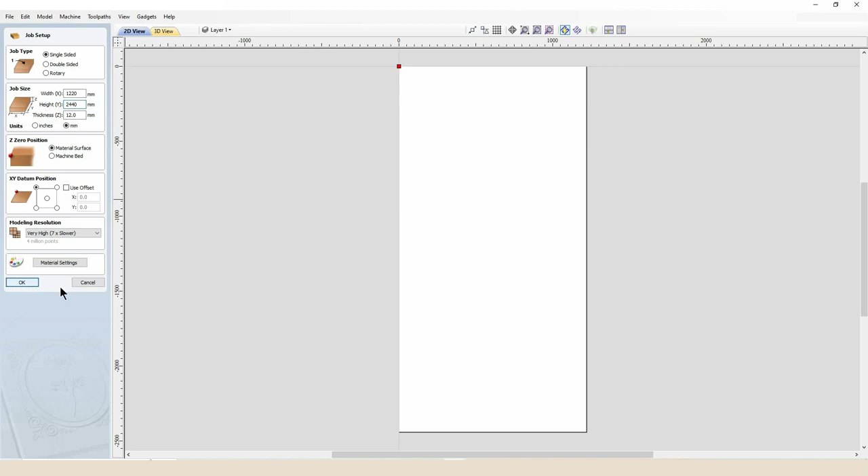Let's get started. So I'm going to go into creating a new file. And the first thing we're going to do is set up a full 8 by 4 foot sheet. And our stock is 12 millimeters thick. So we're going to dive straight into the Gadget area of VCarve Pro, and we're going to go down to Box Creator. Now, I want to show you an example of how Box Creator kind of functions.

Now, the first thing I'm going to do, it's going to throw up an error, is because our box components will not fit completely on this sheet. Okay, so these are our basic parameters. We're going to create all sides to our cube. We're going to be using a 5 millimeter end mill for this one, and I would like a tab lid, and I would like square tabs.

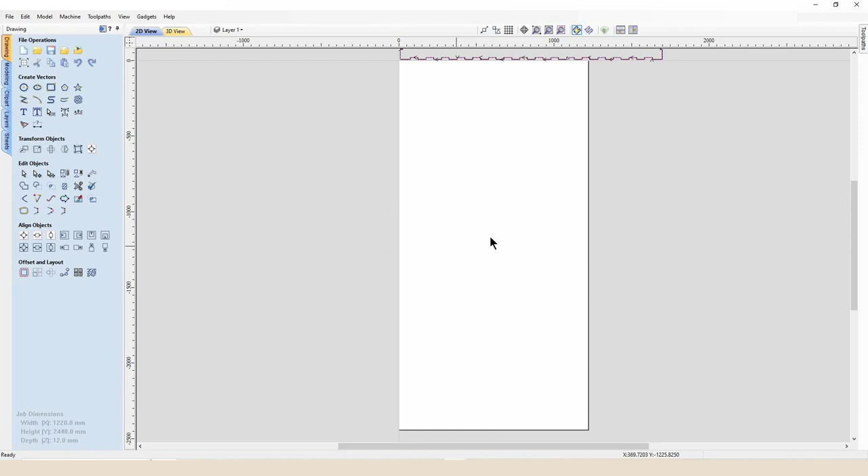So for this particular box, we're going to make an allowance of 0.1. You are probably going to need to play with this allowance feature to get your finger tabs to fit exactly how you want them. So you'll notice it's now saying that it couldn't arrange quick enough, which basically means all of these parts don't fit on this sheet. So I'm going to delete the toolpath that is created, and I'm going to flash up and I'm going to delete all of the parts.

Now, the quickest and easiest way to get around this is to create a much bigger workspace. So I'm going to change that to 8 by 8 square, and that should be big enough now. When I go back into our Box Creator gadget, it's kept our 1685 in width, our 375 in height and depth. It's kept our joints. We just need to re-input the 0.1 allowance. We want a tabbed lid, and we want square joints.

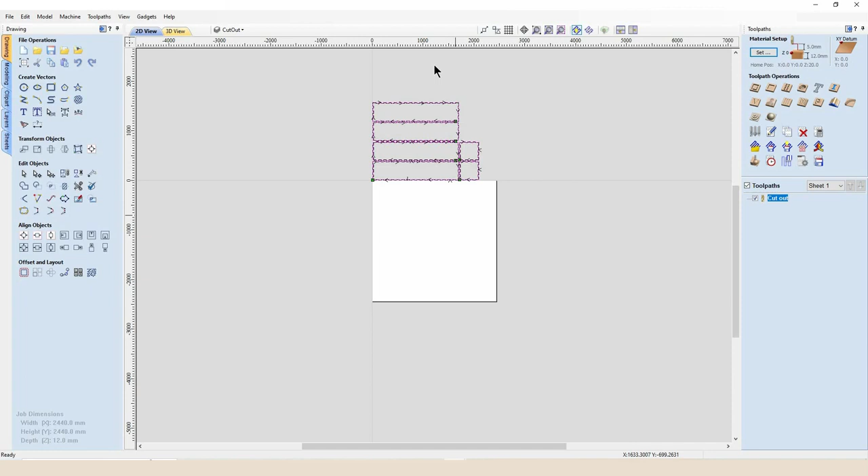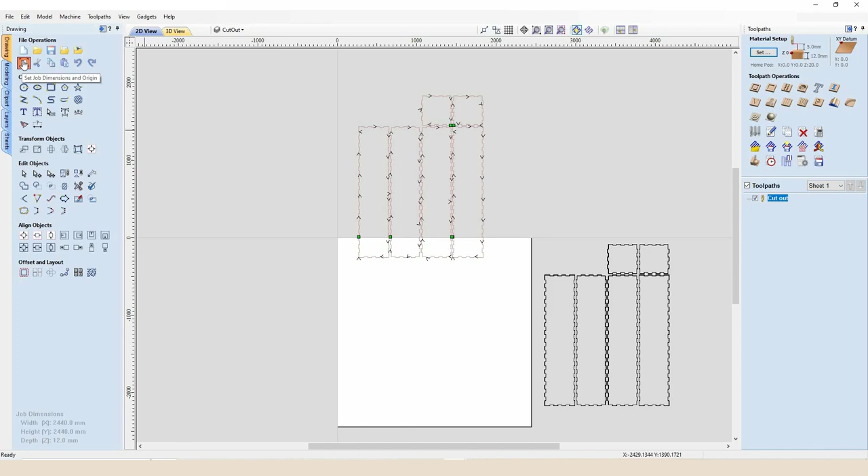Now what it's done is it's repopulated all of our parts. So I'm going to pick those up and I'm going to turn those 90 degrees. And if I come across to our toolpath and recalculate that, that's now going to recalculate all of our parts together. So for this exercise, I'm just going to drag it down to here, out of the way. And I'm going to come back over to our job dimensions, and I'm going to change that back to an 8x4 sheet. Okay, so that's a really easy and quick way to cheat the system and effectively get what you need.

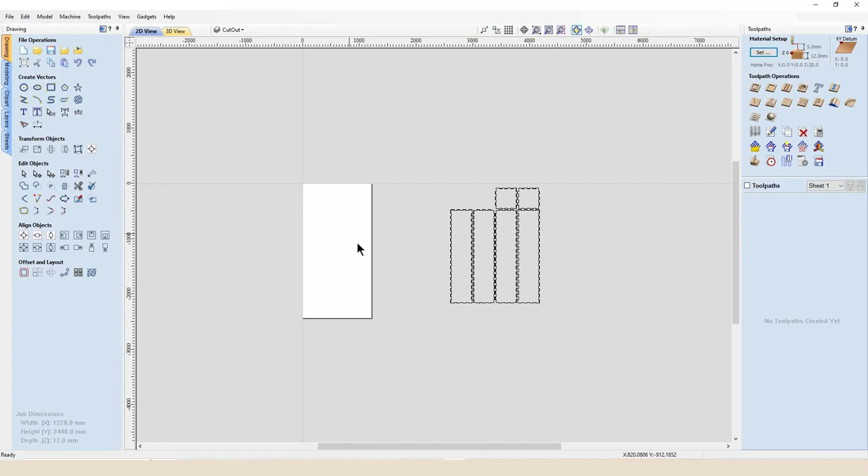All right, so you can see there's all of our 50 millimeter tabs. There's all of our box components. So the next step is going to be creating some smaller boxes, which are going to sit on the inside of our flight case, and that will be used then to hold our X-Beam in position. So for this box, we are going to have a width of 400 millimeters. We're going to have a depth of 95 millimeters. We're going to have a height of 80 millimeters and a joint width of 20 millimeters.

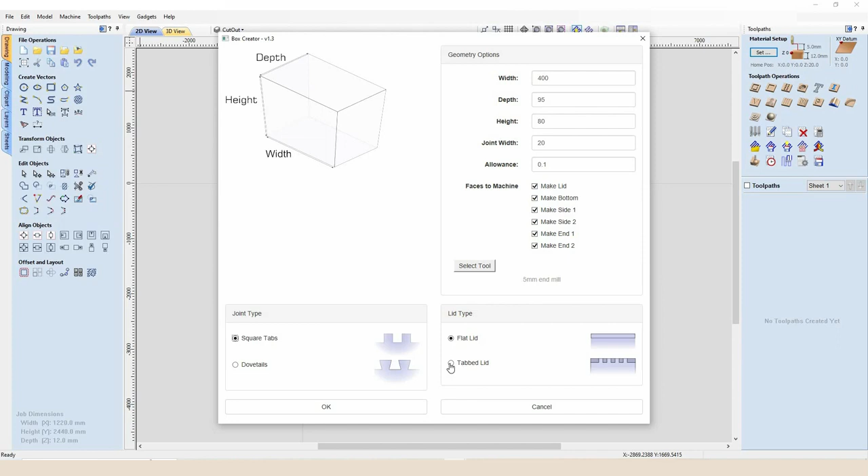Again, we're going to have the same 0.1 allowance. We're going to use the same 5 mil end mill. And again, selecting the square tabs and a tab lid. And you'll see there are our parts. So we'll orientate those by 90 degrees. And we'll drop those there.

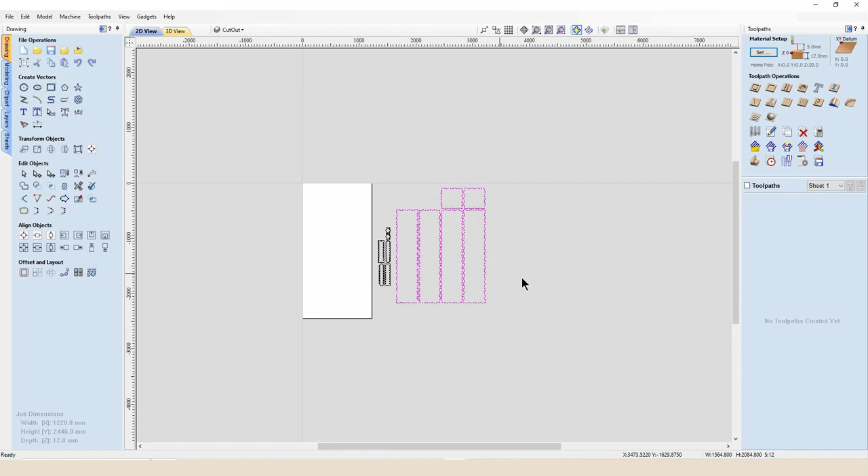Okay, again, I'm quite happy to delete this pre-predicted toolpath because we're going to do something quite clever now, which is we're going to re-nest, and we're going to use VCarve then to tell us how many components we can fit into one sheet. So if I start at the bottom right of my screen, hold the left mouse button down and come up and drag and select all of those parts, I'm going to come across to our nesting function.

Okay. So we'll start off at the top. We've got our 5 millimeter tool. We want to create a clearance between each part of 8 millimeters. And we want a border gap around the edge of our sheet of 20 millimeters, which is going to allow us then to fix our sheet down.

Now, just be warned, if you're going to try and cut a part which is full 8 on the sheet, by having the border gap of 20 millimeters, it won't allow you because it believes that part will no longer fit on your sheet. So we're going to allow it to rotate our parts by 90 degrees for best fit. And we want a number of copies. We want just one for the time being.

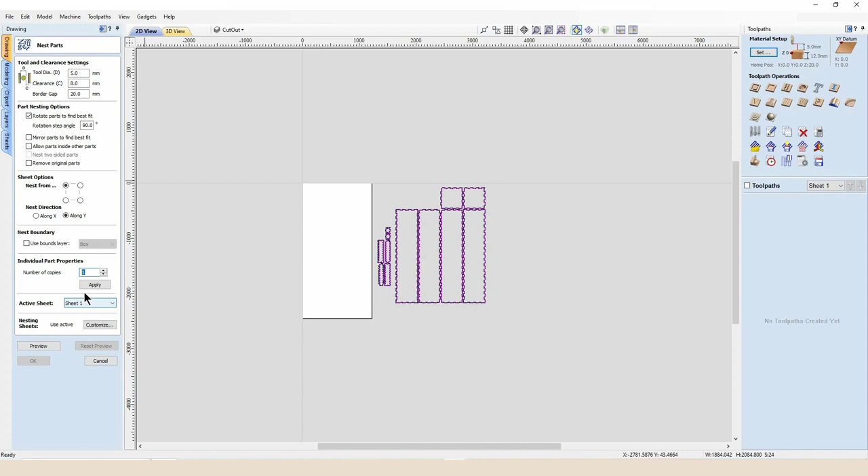So we're going to select apply. And if we preview that, that will then bring up sheet 2, which has a number of our parts, and then sheet 3. Okay, so I'm fairly happy with that for the time being. However, I'm going to make some changes.

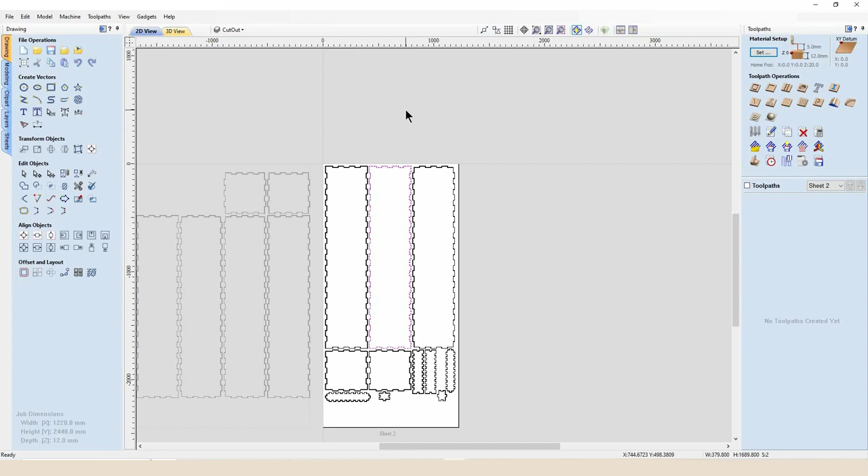So this part here, I actually want on sheet 2, which is going to be our lid. So if I hold Control and press X, then double click on sheet 3, and then hold Control again and press V. That's now copied and pasted that part. I'm now going to select these parts for our side piece. I'm going to hold Control and press X again. I'm going to come back to sheet 2. I'm going to hold Control, press V, and then I've got the parts in the correct orientation.

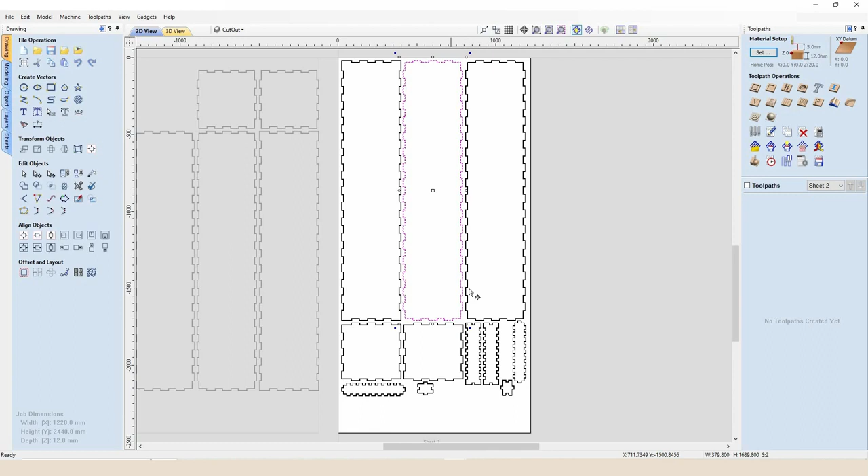So this will be our base, and this will be our 2 sides. This is going to be our ends, and this will be one of the internal boxes. And again, I'm just going to shuffle this around to get it just how I want it. And then effectively we have a top and base and the 2 sides. Now I need 2 of these internal boxes. So if I just bring this along, shuffle it around so it's reorientated for me.

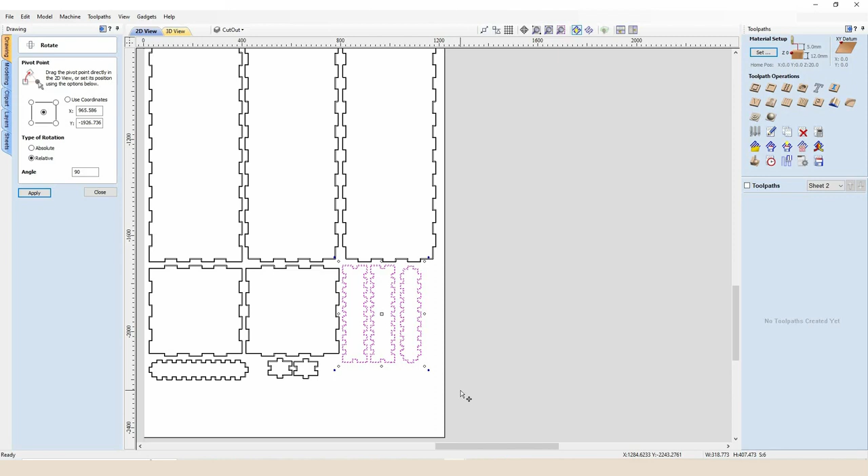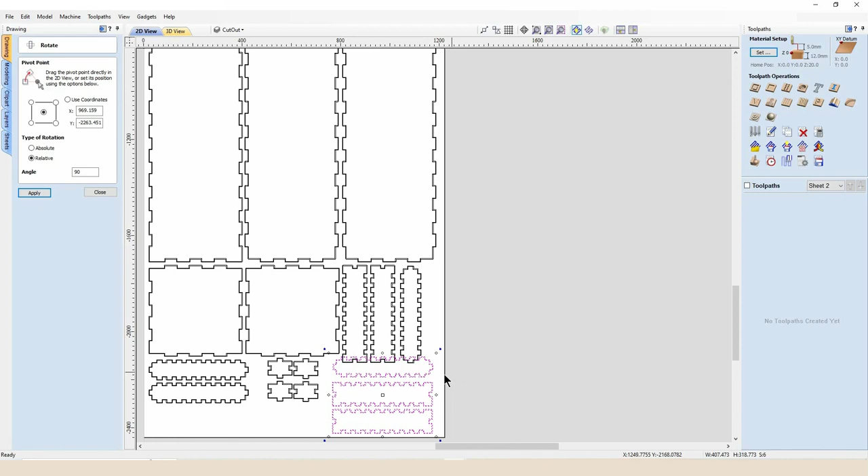I'm going to select these and hold Control and press C for copy and then V for paste. And I'll move these bits along here out of the way, just so I know what I'm looking at. And I'm going to hold Control again, press C and V to recopy these parts. And now I'm just going to shuffle these around and reorientate them so they fit on our sheet. Okay, so very simply, that is the main components of our job.

We're now going to start to add some of the different features to make this flight case function. So I'm going to start by adding the handle holes for our flight case handles. So those handle holes are going to be 130 millimeters by 80 millimeters tall. And I'm going to drop one in there. I'm going to drop one in there.

So if I start by selecting our first handle hole and then holding shift, I'm going to select the actual vector. I'm going to come over to our alignment tools and I'm going to center the object within this vector. So that's very, very simple and easy. Again, I'm going to select this handle hole and I'm going to select this vector. And again, I'm going to center that one.

That's those objects done. The next thing I need to look at is then going to be the cutout apertures for our flight case wheels. So I'm going to create a square with square corners. Well, I'm actually creating a rectangle. I want our rectangle to be 35 millimeters on the x-axis and 55 millimeters on the y-axis. And again, I'm going to drop one there. I'm going to drop one there. I'm going to drop one there and one there.

So with a little bit of shuffling, I'm going to select one of my flight case wheel apertures and I'm going to select the vector which it will sit within. And I want it to sit in line with the bottom. All I'm going to do now is using the direction keys on the keyboard, I'm going to shuffle this into place so it sits bang on this vector line. So you need to zoom in and zoom in and zoom in. Once you get used to doing it, it's not too bad. It's a little bit fiddly at first.

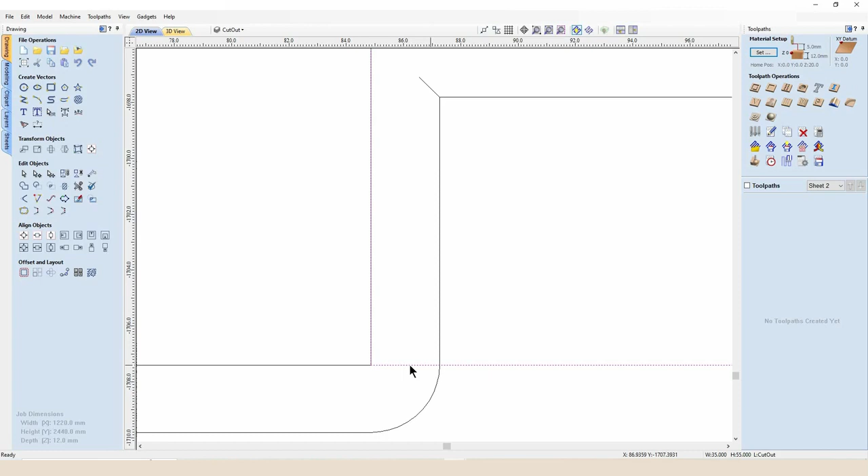Okay, so I'm really happy with that. As I zoom in now, I'm very, very close. I'm onto that line. So you'll notice the new vector, which we're going to cut, our little internal profile, sits perfectly in line with the bottom of the vector. And I'm going to orientate it to sit inside of this tab here.

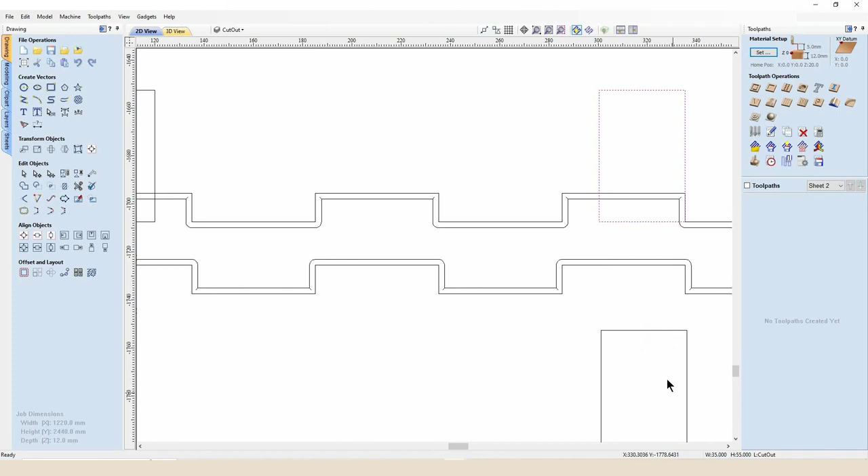So we'll do exactly the same again. We'll select this hole. Holding shift, we'll select our outside vector. And we'll use align to the bottom. And we'll just nudge that across until we're happy with the placement where these two vectors are sitting smack bang over the top of each other. So again, for these bottom wheel cutouts, we'll follow exactly the same principle. We'll align it to the top.

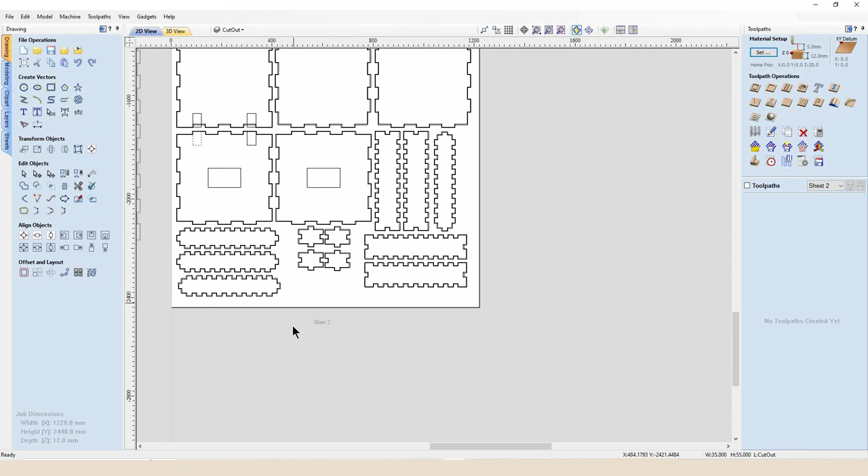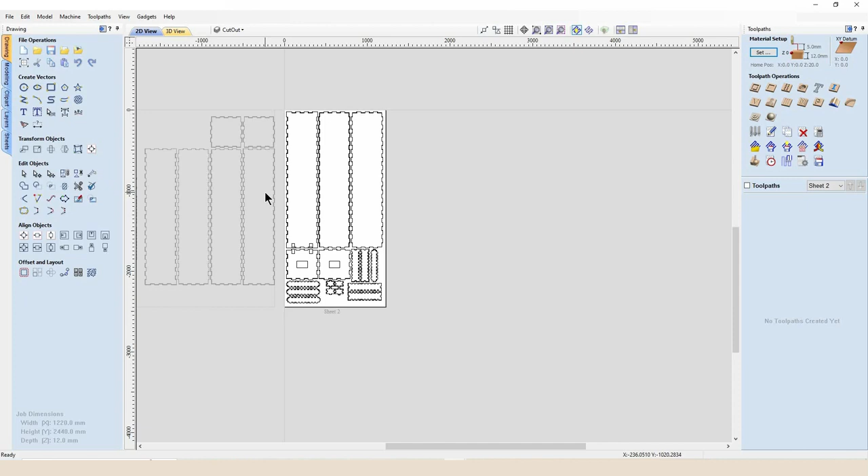At this stage, I've got all of the main components designed for the outside of our flight case. And I've also designed the inside parts which are going to hold our X-beam inside the flight case. We've created now some of the different handle hole features and the internal cuts then for our small wheels. We're going to go ahead now and design the extra auxiliary parts which are going to go inside the flight case and hold all that X-beam in place while you're in transit.

So the next part I'm going to design is going to be some plates that will sit inside of the X-beam and hold the upper part of the X-beam into the flight case. So we're going to have two parts at 180 millimeters on the X-axis, and they're going to be 390 millimeters on the Y-axis. So I'll drop one there.

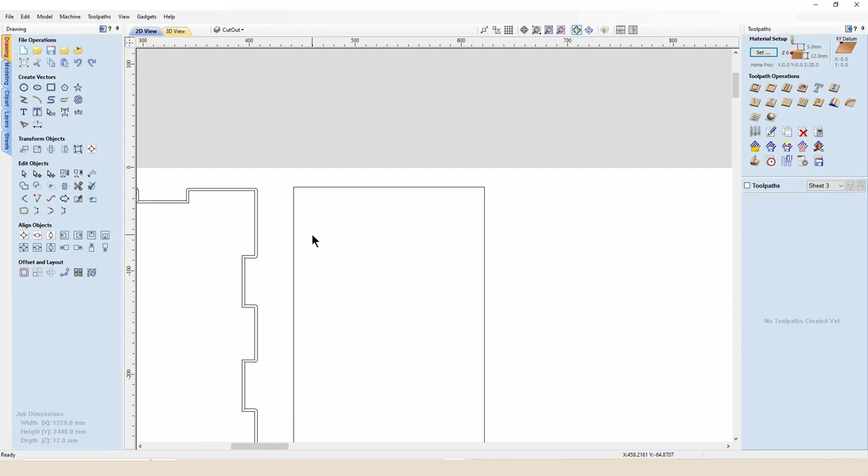We're going to make some modifications to this to fit over the inside of our X-beam, there's a small electrical feature that sits there. And what we're going to do is create a cutout on all 4 of the corners on both parts. So no matter how you've got this part configured, you're never ever going to clash with it. So I'm going to make a small extra box, which is going to be 15 millimeters on the X-axis and only 10 millimeters on the Y.

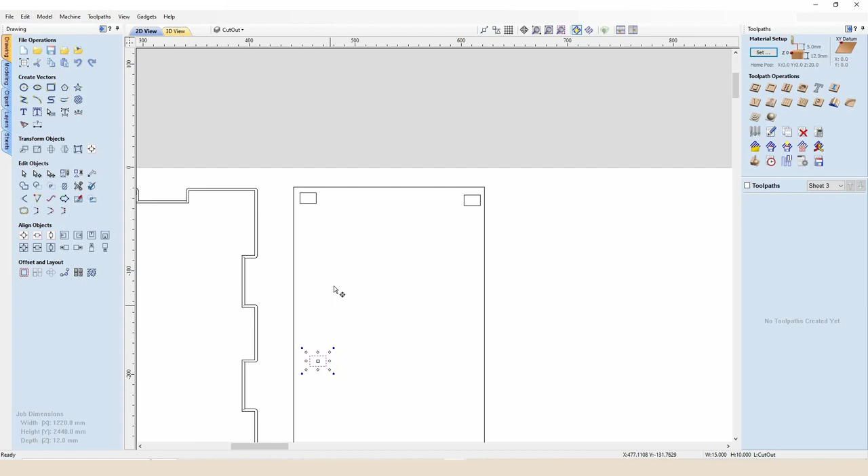And we'll just copy and paste. And we'll set one up for each of the corners. And again, using the alignment tools, very simply, we're going to select our part, we're going to select our outer vector, and we're going to drop those into place. Nice and simple. And it's accurate as well, that's the main thing.

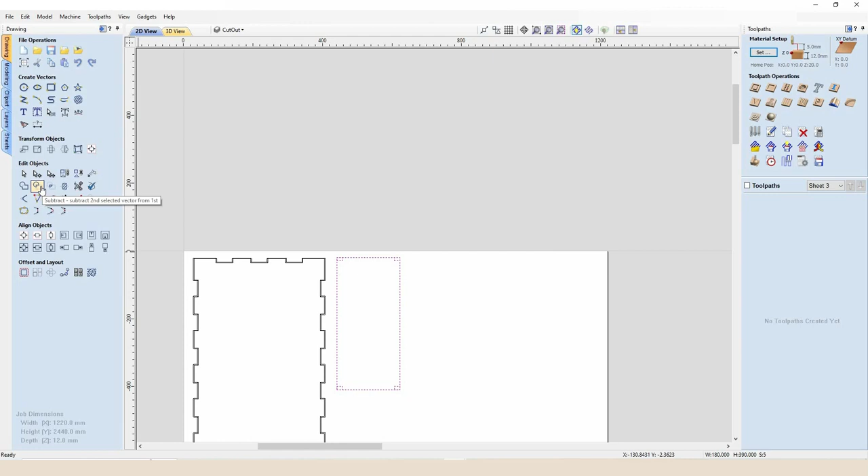So if I start again down the right-hand side, holding the left mouse button down, I can select all of those. I'm going to come over to the subtract second selected vectors. And what it's done is very quickly, it's cut out all of those extra vector lines that we didn't want. So that's nice and neat and an easy, quick way of doing it.

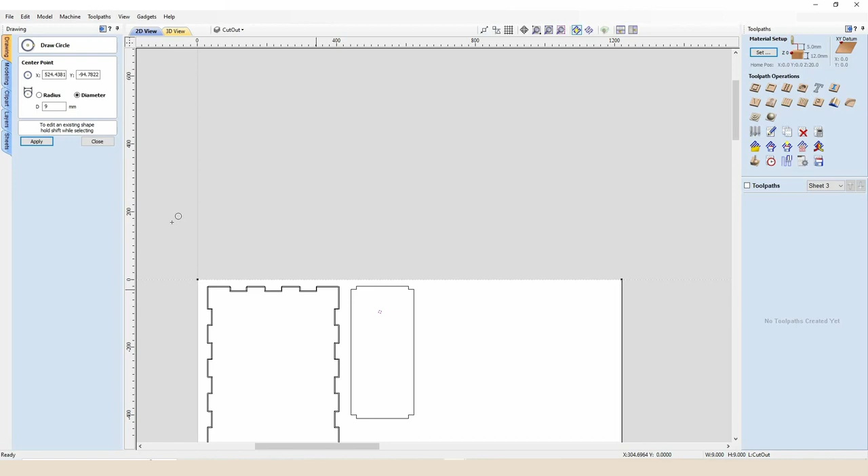So we're going to cut some holes in this box now. That is going to sit over some internal bolts. So we want a 9mm hole. So we'll select that one there. And these holes are going to be offset, which will give you a center measurement. They're going to be offset by 261 millimeters.

So I've got both of those holes there. I'm going to group those. For the moment, I will just center them into my board. Okay, so now I'm going to take those holes, and again, I'm going to select our outside vector, and I'm going to center those 2 holes to sit within this little fixing plate.

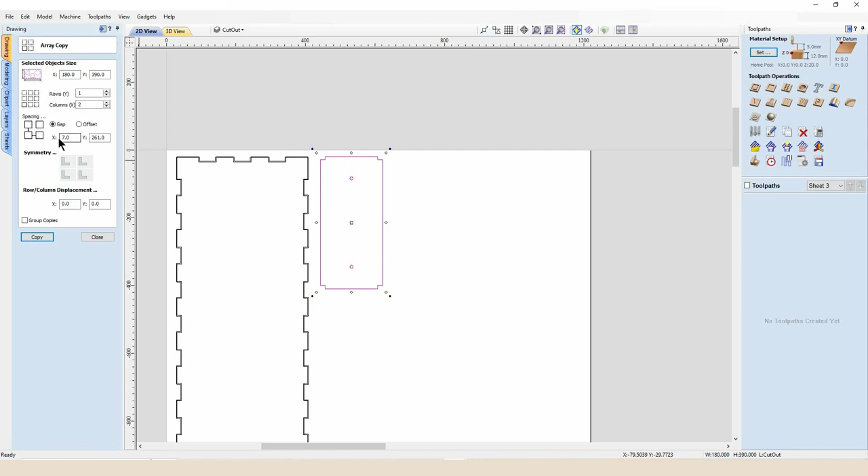Okay, so nice and simply then, I'm going to grab both of these. I'm going to press G on the keypad to group them together, and I'm going to nest them. Am I going to nest them? No. Then I'm going to array copy them. I want 2 of those on the X-axis, and I'm going to gap them to be 7 millimeters apart. Okay. So nice and simply, we're going to do that.

And I'm just going to pick up all of these parts now, and move them across so they're closer to minimize our offcut. And if I press U, that's then going to ungroup those parts again so they can all be moved singular. Okay, so now I've got those parts designed. I'm going to pick them up, and for the time being, I'm just going to move them off the sheet, ready for some better orientation later.

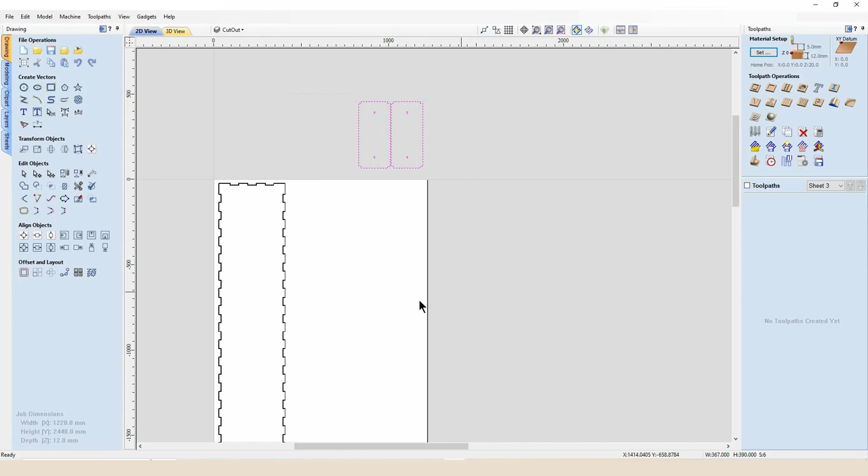So the next stage then is to create some strips that are going to sit on the inside of the lid, and will just help keep everything nice and firm when it's all together and help you align the lid when you're putting it back on. So the first part I'm going to make will be the long strips. So they are 1,661 millimeters in length. I'm going to make all of these strips 60 millimeters wide.

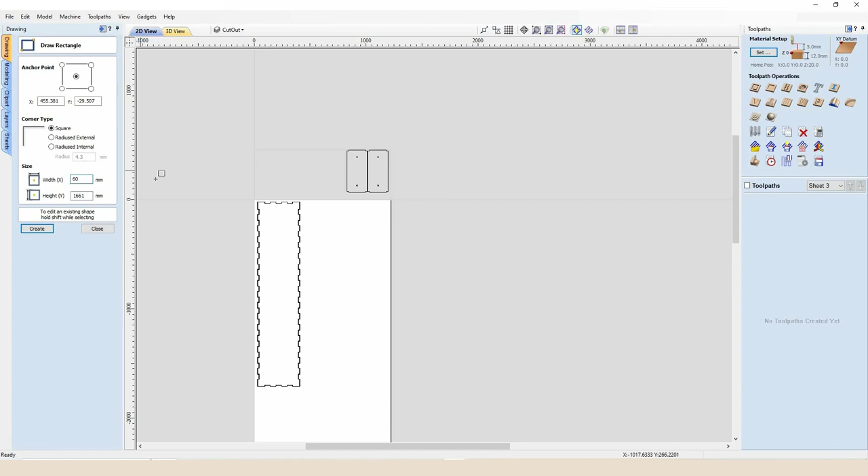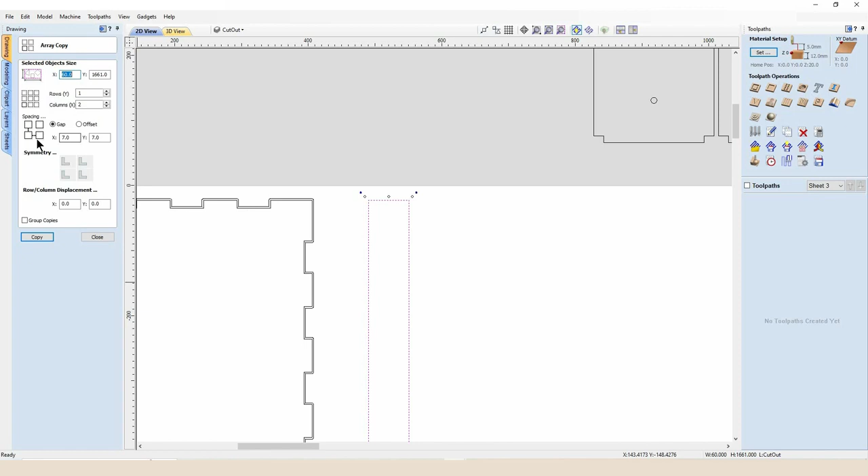So again, if I drop one of those onto my sheet, I can then select this first vector and get that to run nice in line. So all of our cuts will be nice in line. And I'm going to pick up this one, and again, using the array copy, I'm going to ask for it to copy 2 of those across the X-axis with a 7 millimeter gap. So we've got both of those. I'm going to bring them along and just move them closer now to our lid part.

I don't want to move them too close because I'm going to have these little square parts left on our sheet. So if I move these too close, then these will become small little cubes that might pop out of your sheet and interrupt your cut. So the next step is to create the little width strips. So again, keeping that X-axis at 60 mil, we're going to change the Y-axis to 328 millimeters.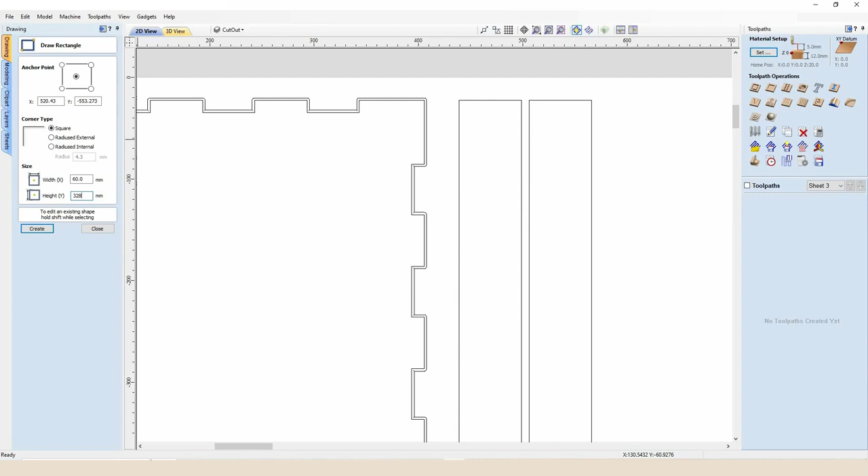And again, for the time being, I'm just going to drop one over here, move that out of the way. I'll select this one again, and we'll just get that to run in line for the time being. Very simply then, I'm going to pick up that one vector, come back to our array copy, and using exactly the same parameters again, we now have 2.

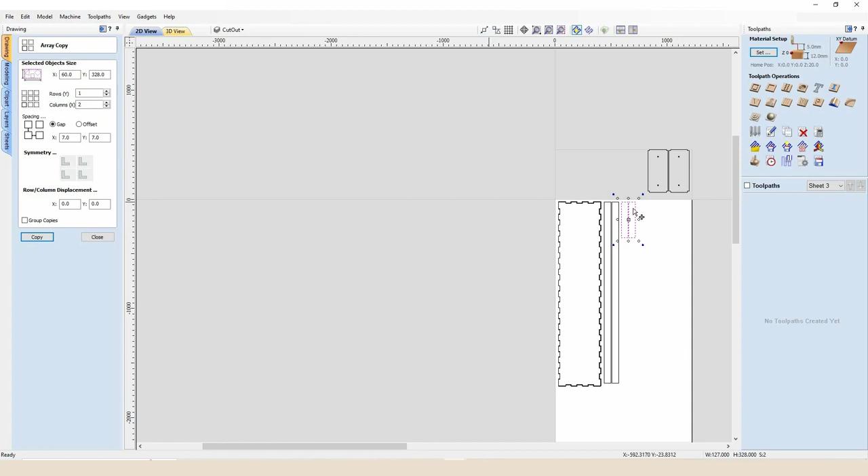Okay, so I'm now going to start to orientate those on our sheet, and I'll pick up all of these parts again, and I'll line those all up. Now, what I can do is I can make a 7 millimeter long box and just drop it there, and use that to start to align our parts. So I've got my 7mm box added.

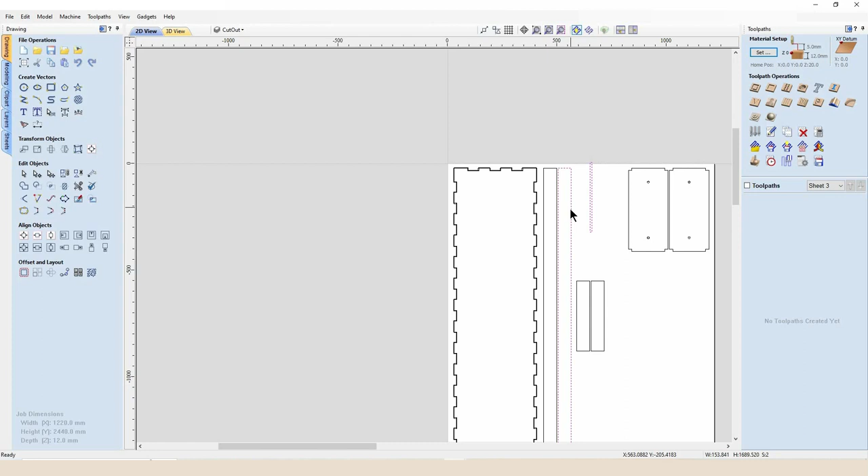I'm going to nudge that up against this vector, and I'm going to select this one and our little scrap 7mm, and just bring that across so that's nice and efficient. So we've got nice, even 7mm gaps on everything. And again, I can bring this down and I can pick up these two vectors and group them together and get them to align nice and neatly with our 7mm spacer.

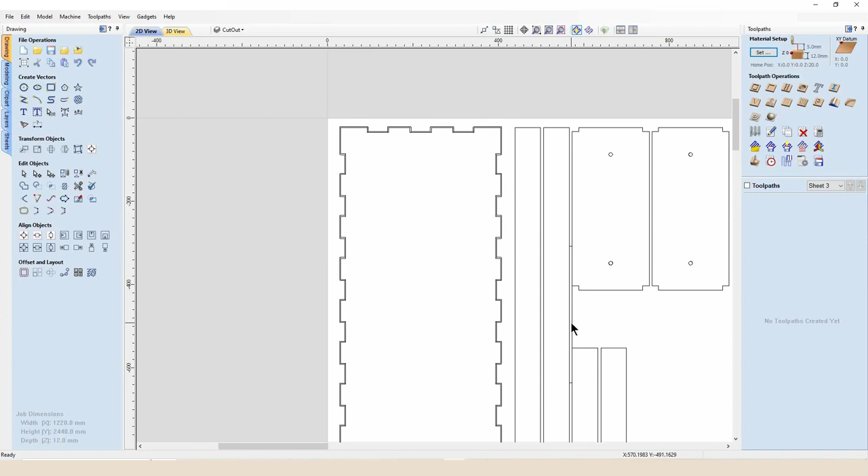And for the time being, I can just delete that 7mm spacer and I've got nice, even 7mm gaps around everything. So I'll just bring these parts up a little closer and we'll ungroup those. And again, I'll come back to these spacer parts for the time being and just ungroup them. There we go, nice and simple and an efficient use of our sheet.

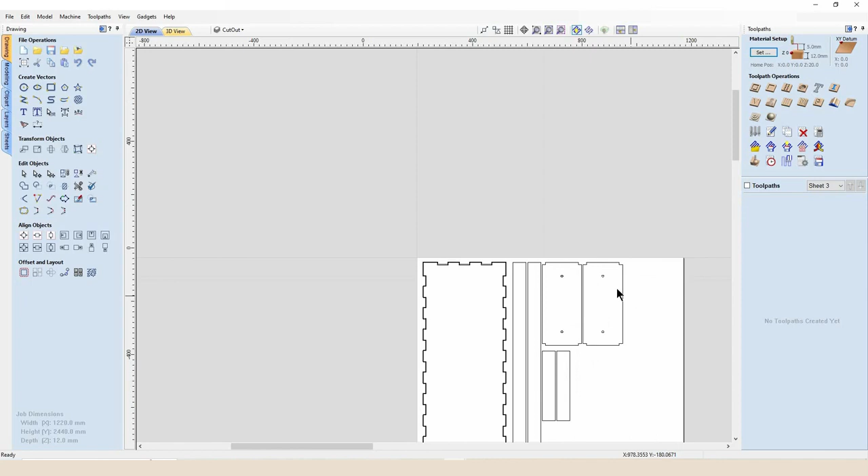So the last thing I would like to create is now some spacer packers, which are going to sit on the inside of our little lids. And those little spacer packers then are just going to create a gap between our X-beam and our internal boxes for our nuts and washers to sit. So I'm going to want 4 of those.

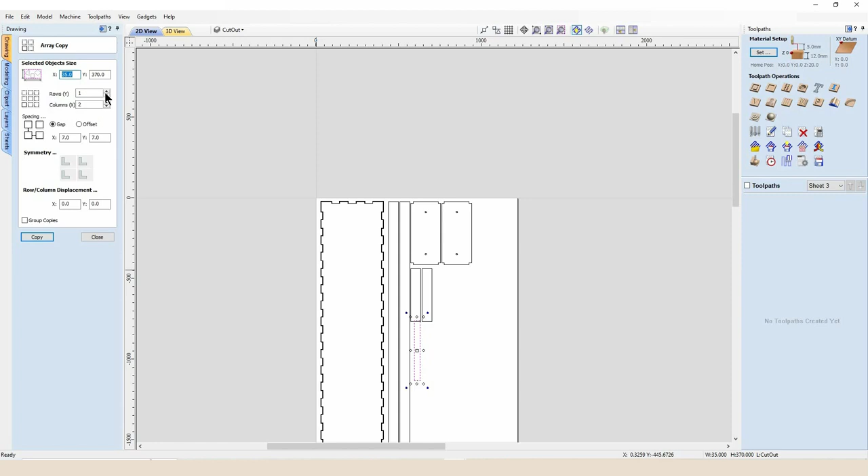So the first thing we'll do is we'll create one, and they're going to be 35mm wide by 370mm in length. And we'll drop one down there. And again, using our array copy, I will select 4 of those. Nice and simply, they've all popped down in line. So I can select all of these 4 and I can just nudge them along till they run in line with all the rest of our parts. I'm making sure I've got adequate spacing on the y-axis then, just so I can add some tabs for some strength.

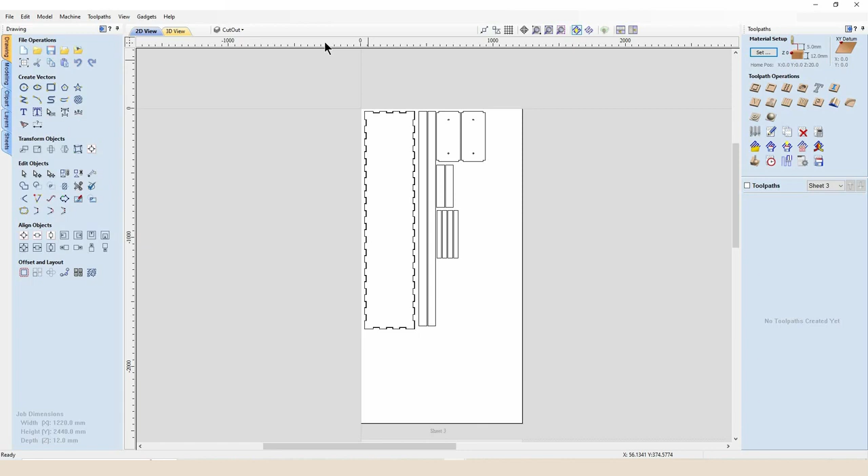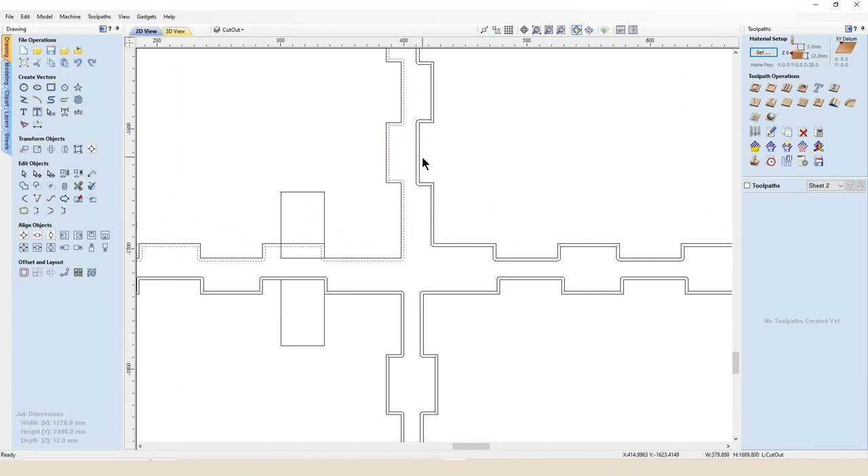That is all of our internal accessories created then, which is going to finish off the inside of our flight case. So now we're going to go back to our second sheet firstly, and we're going to create some very simple toolpaths. Okay, so you'll notice any vectors we create with the box gadget is going to be the actual box vector itself, and this secondary vector with this dotted line here is going to be the line that will create our toolpaths on. So I'm just going to hold shift down and I'm going to go and select each one of those vectors one at a time. Okay, so now I've got all of those outside vectors selected.

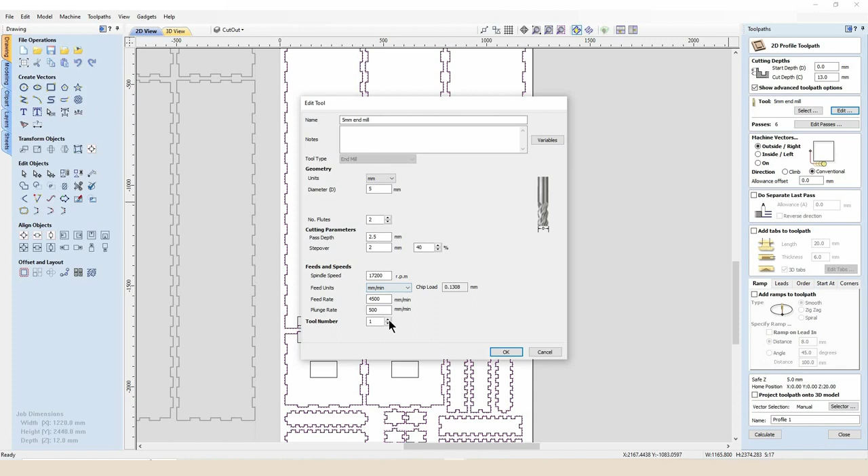I'm going to go to Profile Toolpath, and we are now going to mimic exactly what the box creator gadget will do. So I want to cut 1mm into my spoil board. So I'm going to make sure I've got a 13mm depth of cut. I'm going to select my 5mm end mill, and I'm just going to check that I've got 17,200 RPM. I'm cutting it 2.5mm per pass, and I'm running at a feed rate of 4,500mm a minute, or 4.5 meters. And I want to cut on the line.

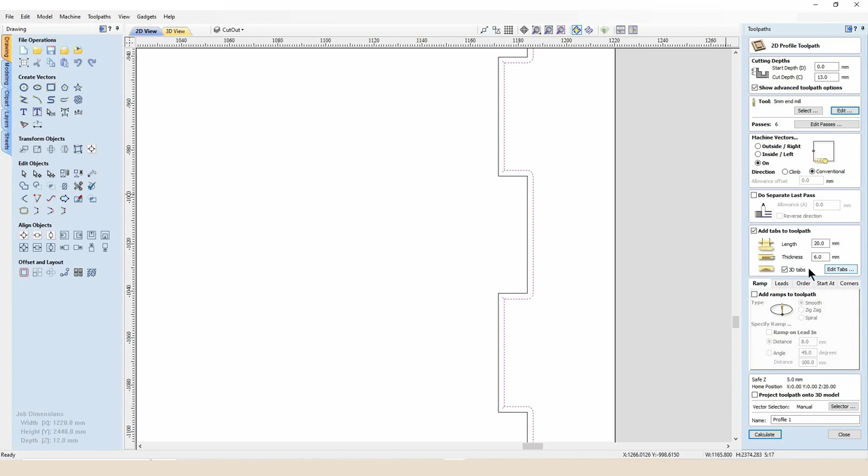Okay, so that's very specific in regards to the box creator gadget. That cutter is going to straddle the line and cut on the line. I'm not going to do a separate last pass because that's going to make our box effectively smaller. And I'm going to create some tabs at 6mm high by 20mm in length, and I want those to be 3D tabs.

Okay, so the box creator gadget is now going to throw up all of these tabs. And in a minute, I'm going to go around and I'm going to reselect and deselect certain tabs to get everything exactly where I want it, because A, there's a lot, and B, I'm not happy with the placement of everything. But for the time being, just to make sure we've got some tabs, I'll leave that selected.

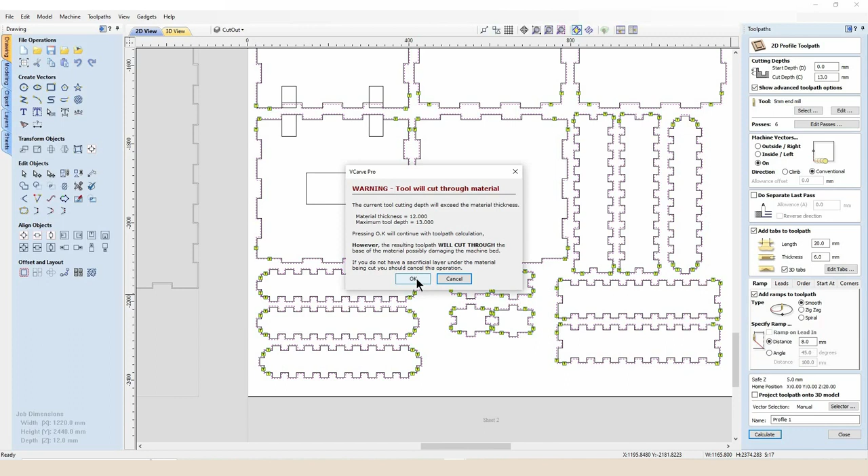And I'm going to select ramps. I want a smooth ramp, and for this particular project, I'm going to do it 8mm in length. Now, as I press calculate, it will throw up the warning to say that I'm going to cut through my material, which is okay. And now it's going to project my 3D model to show my preview.

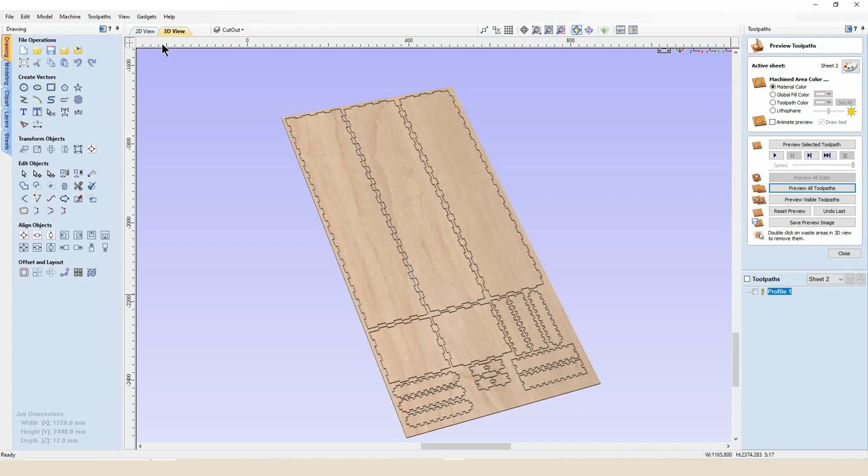Okay, so as you look at the sheet, we've got all of our parts laid out. We can make sure there's no big blank spaces, which means certain vectors haven't been selected by accident. I'm going to come back in and double click on this toolpath, and I'm going to go to Edit Tabs. Now, I don't want 4 tabs in the corners. It's too much. And as you see, this 20mm long tab will effectively try and wrap around the corner, which is just going to make your life really difficult in regards to cleanup.

So I'm going to take these tabs away, and I'm going to add the tab there, and then I'm going to move this tab over to here. So I've got the 2 tabs running in line. That's going to add extra strength to our project.

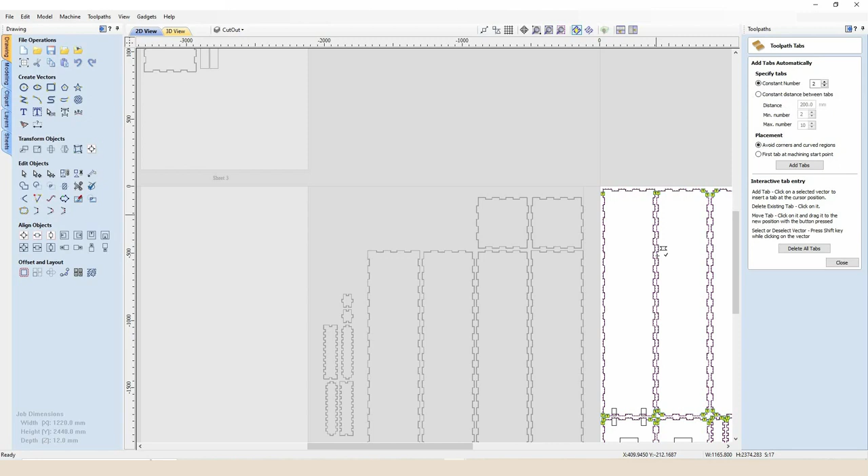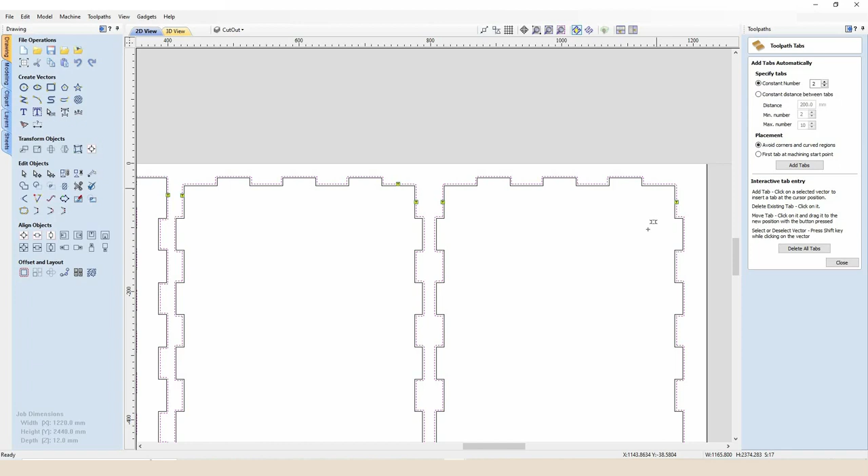Also, because these box parts are so long, I'm going to add some separate tabs in the middle. And again, what I'm going to try to do is line these tabs up so the strength of the wood is left going in nice straight parallel lines. Okay, that will be really important then on all of our parts where we created our 7mm gaps. So I'm just going to go down through, reselect and deselect the tabs where I want them.

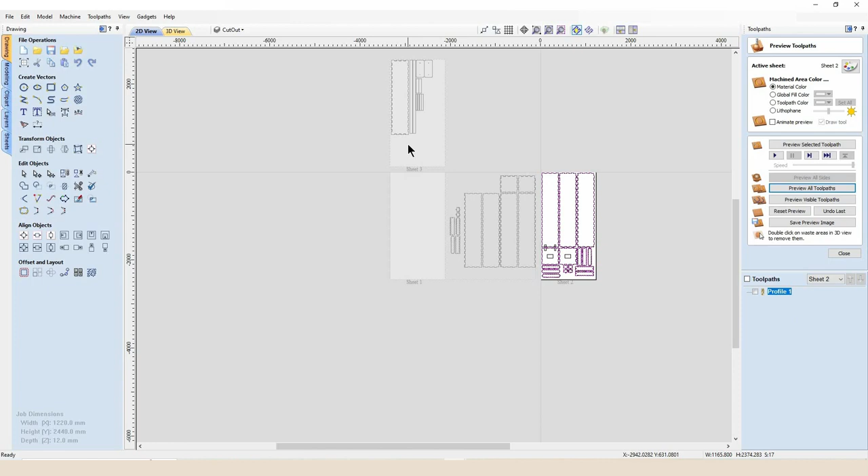Okay, so at this stage, while all the external box profile cuts are already in the memory of VCarve, I'm going to come across to sheet 3, and I'm going to set up the toolpath then for this lid, which again, just roughly checking, is 13mm deep, 5mm end mill, cutting on the line. And we want to add our tabs, we want to add our ramps.

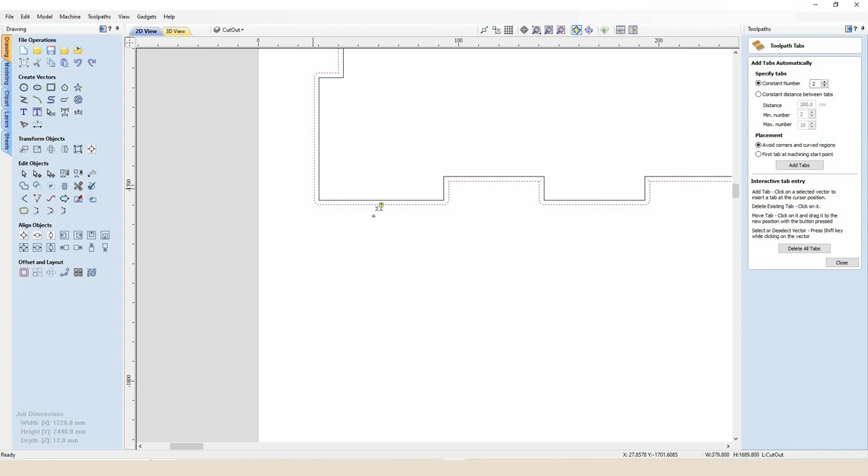And again, I'm just going to quickly reselect these tabs to be where I want them. So again, just avoiding these tabs in the corners and getting those tabs in those nice straight sections there. So I'll throw some tabs down here as well, just roughly in the middle of our sheet. Okay, I'll just name this one box lid.

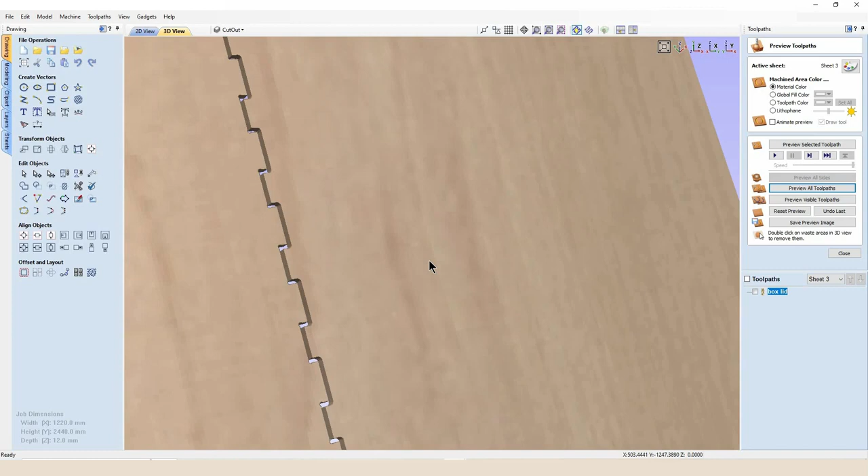So if I preview this file here, you can see there's our cut going all the way through. There's our nice little fillets in the corner. There's all of our tabs. Okay, so I can jump back to the first sheet, finish that one off nice and simply now.

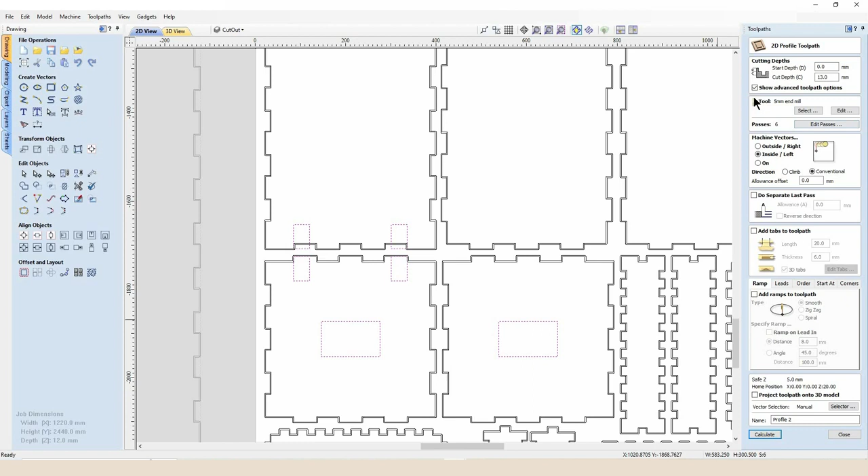Holding shift, I'm going to select each one of these vectors, which will be for our internal cuts. And I will create a profile cut, cutting on the inside of our line. Same tool, same size tabs. Call this one then inside cuts. And again, we'll use the same ramping strategy. So all the strategy is exactly the same. Okay, so there's our inside cuts now orientated on our sheet.

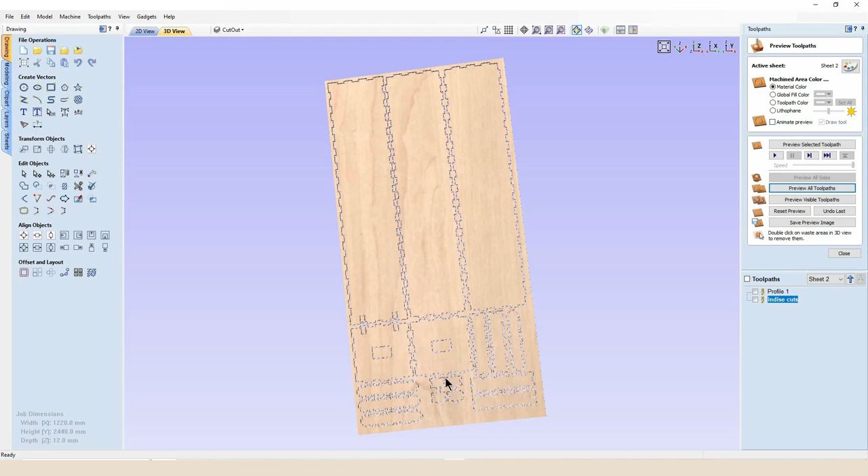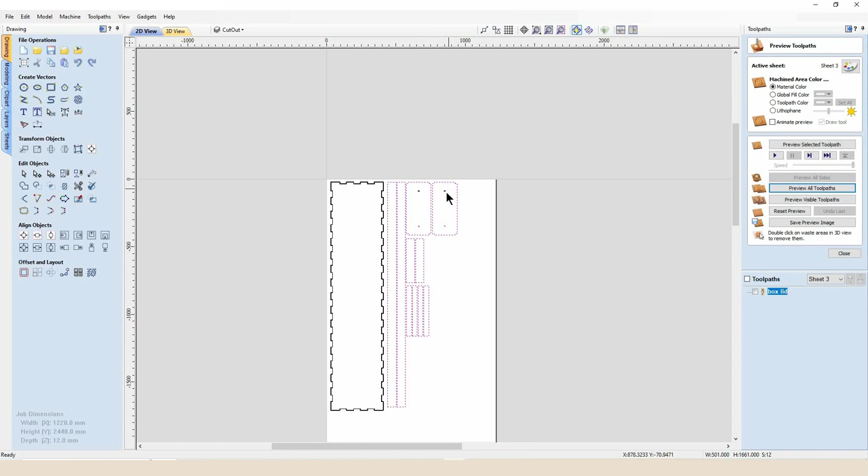All right. So the last toolpath to do is going to be for these extra accessories now. So you'll see now why we've created these different 7mm spaces around everything. So again, if I start at the bottom by holding the left mouse button, any vector I'm touching will be highlighted. So you can see because I wasn't touching these top left holes, you just hold shift and just pick those up.

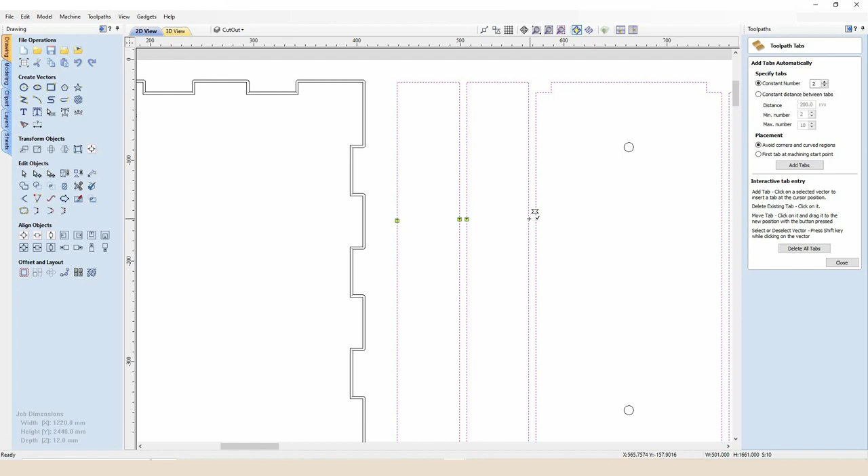So I'll select the profile path to cut outside of the line. We're going to select our tabs. We're going to select our ramps. And now what I'm going to do is select an area where I can fit these tabs in right next door to each other. So as each part is cut out, the tab will be adding the support, bridging the gap between them.

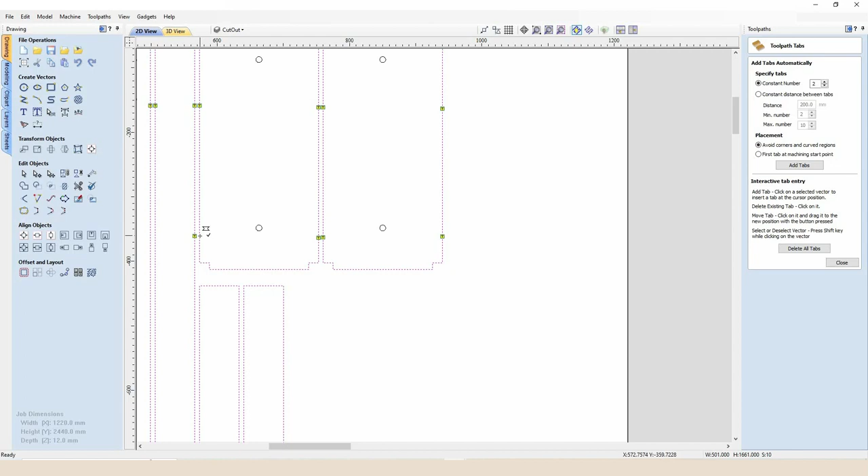And if you're looking at sheet efficiency and trying to use as little stock as possible, this is the most efficient way I've found to do it. So bear in mind, I've got a 5mm tool, and that's going to run a 7mm slot in between them. So it's just going to skim those edges and clean those up as it goes.

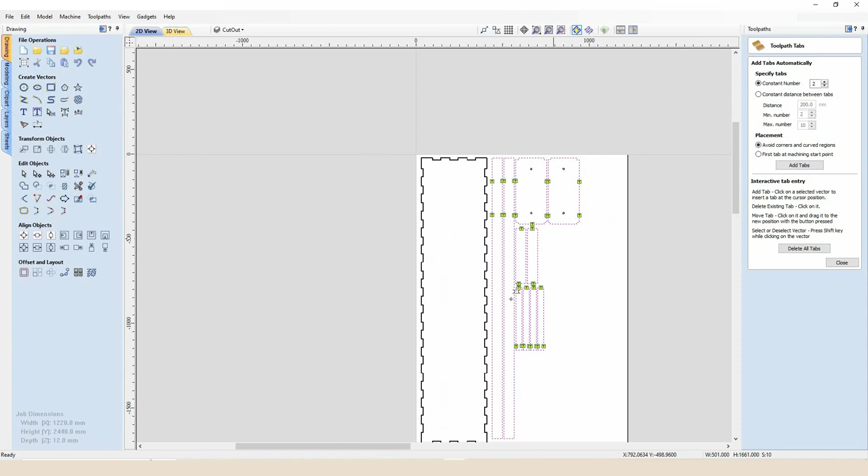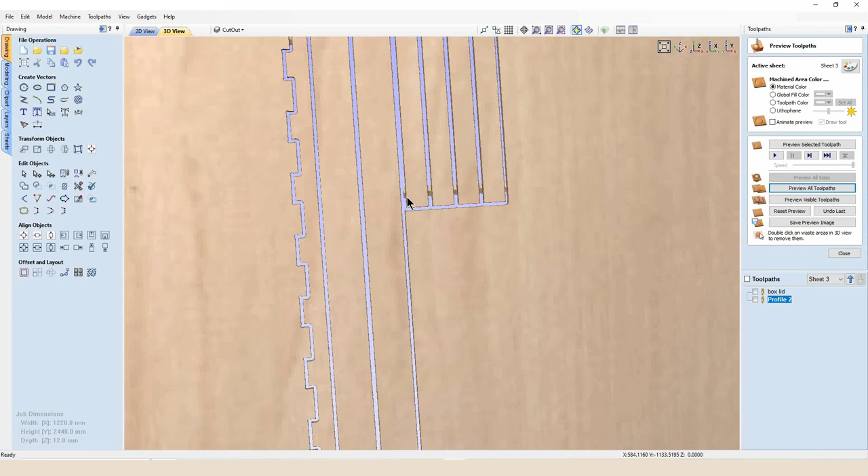Okay, so as I calculate these final toolpaths now, you'll see they become part of our preview. Okay, so if I zoom right in here, you can start to see where we're going to have our bridging tabs connecting and adding support back into this stock. But you can also see we're going to have a section here where these parts are going to be cut away. So if I go back into this profile toolpath here, edit our tabs, you can see where I've missed one.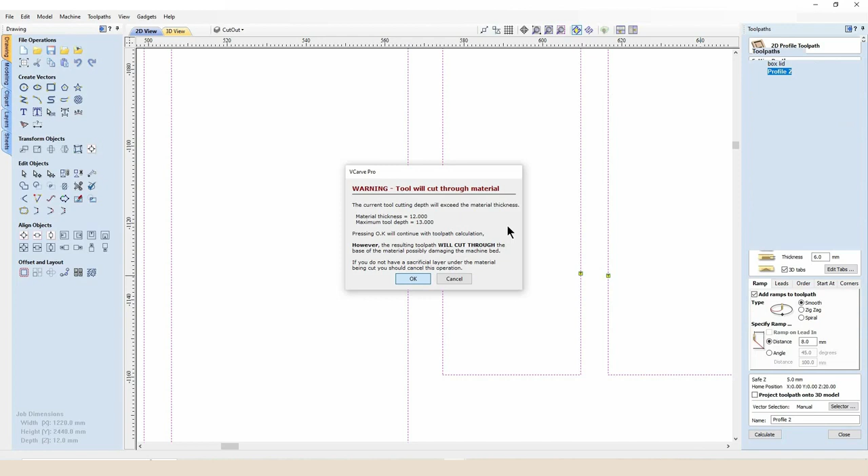So it's always worth going over and analyzing your 3D toolpath, your 3D preview, just to ensure that you're not going to have any parts coming loose as you're cutting away at this sheet. Okay, so if I start at the top by holding control on the keyboard and holding down the left mouse button, I'm then in a position to move my preview around so I can really analyze that.

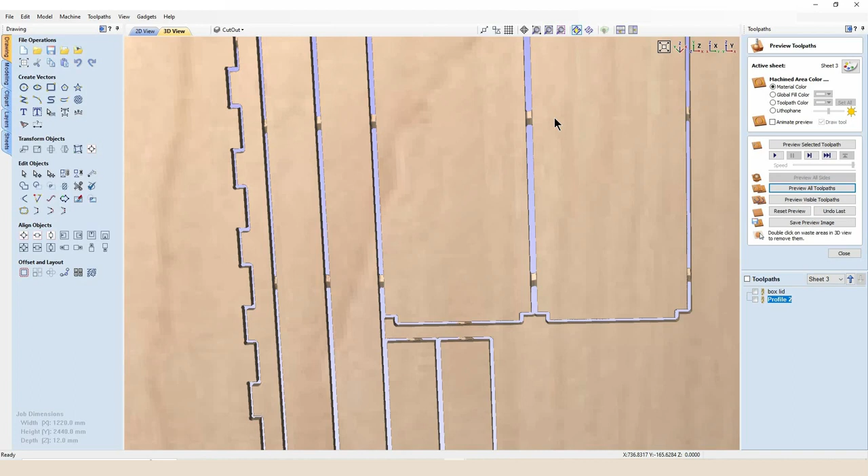I've got a tab, tab, tab, tab, tab. That's all nice and bridged. I've got tabs down here bridging all this together. I've got tabs down here bridging all this together.

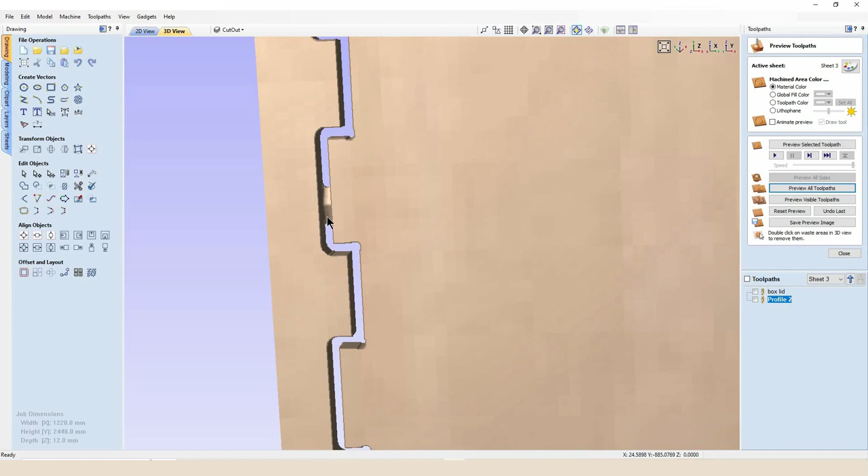So all of our material is going to be nice and supported all the way around. We've got our box components then nice and held into place. Also, what I'm looking out for is to make sure these tabs aren't sitting going around corners, because it makes it really difficult to clean up and get a nice finish. So if I turn it this way, you can see all of our lines.

So we've got our last toolpath to create for this sheet, which will be these internal pockets here. Again, same 5mm end mill. I'm not even going to bother with ramping these cuts. And what I found in the past is you can edit your passes.

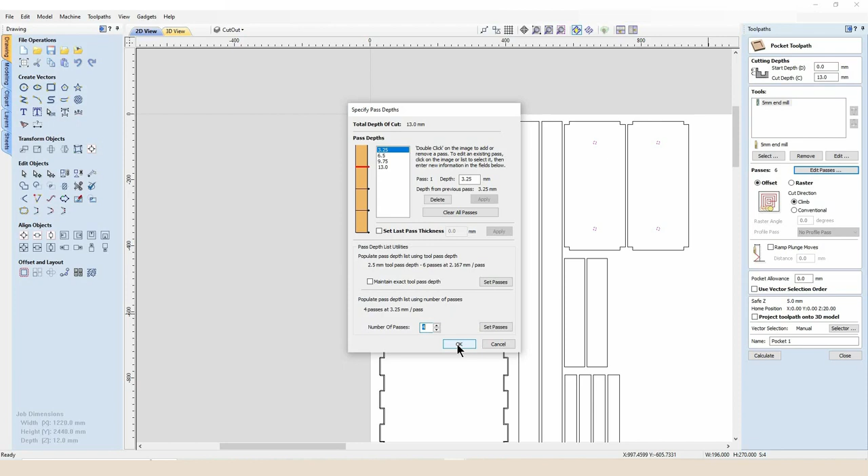This is going to come down in 2.16mm increments all the way for our 12mm sheet. What you can do is edit the amount of passes it will do, and that's going to do it in 4 passes now, which is 3.25mm per cut, which is more than ample. So I'm not worried about a ramp, I'm not worried about any other features, I'm just going to press calculate.

As you can see now, our SmartBench is going to start from our datum. It's going to move across and peck and pocket out each of these holes in that selection order. Nice and simple. So just for easy toolpath management, I'm going to come down and rename these.

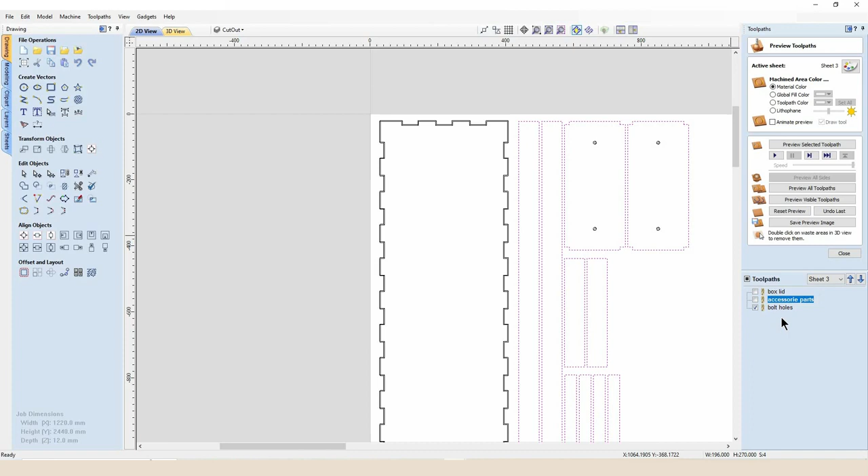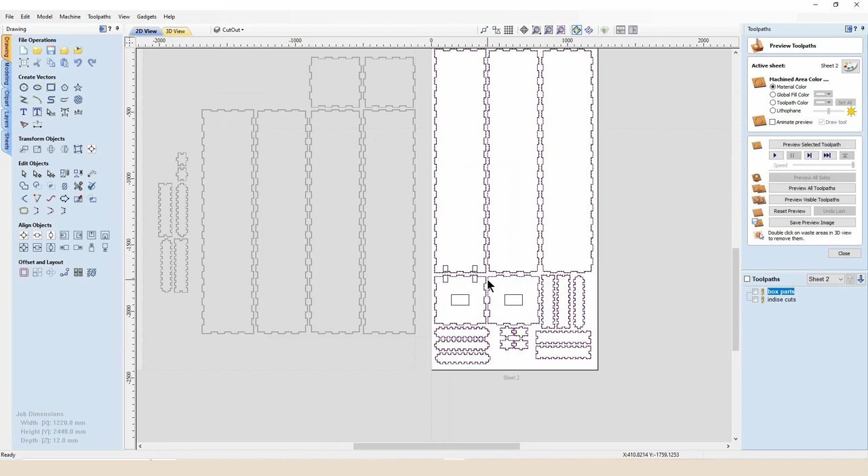Okay, so I've got my toolpaths named. I'll come back over to this sheet and I've got my box parts to rename. As you can see, we've cut down all of that cutting into 2 separate toolpaths, using all of the same cutter. As you come back over to this second sheet, you can see again we've cut everything down into 3 separate toolpaths, again using all the same cutter.

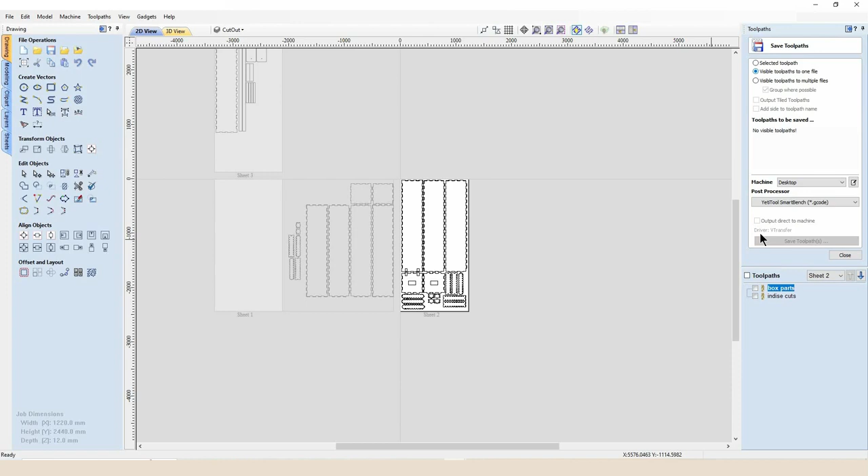So if you wanted to be efficient in regards to your toolpath strategy, you can come over to save toolpaths and select this middle option, which is visible toolpaths to one file. You can then select the order to cut all of the outside box features and then cut all of the internal parts. Alternatively, you could pick up this toolpath and move it to the top, then as you select it, it would cut all the internal cuts first, then all the external cuts. So you've got ultimate options to move everything around to do things in the order that you feel is most appropriate.

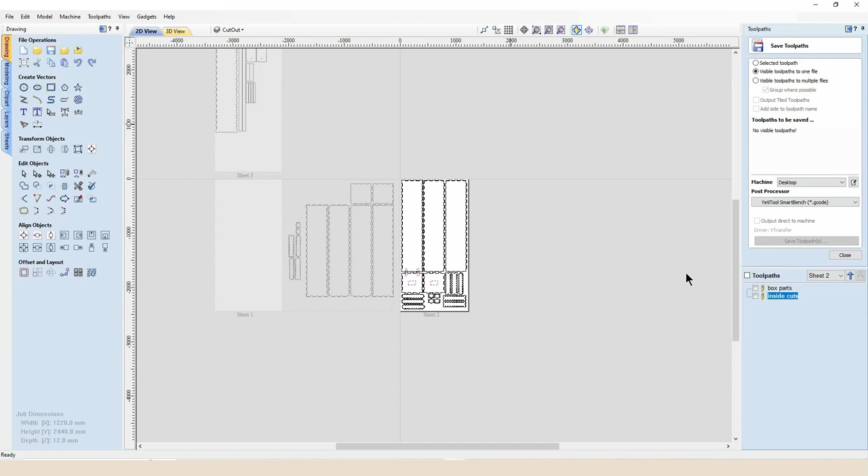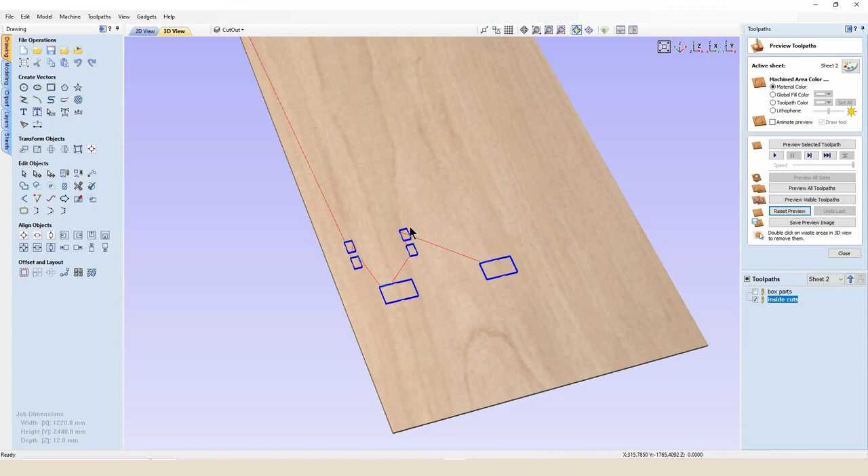And also, as I select the 3D view, if I click on my toolpaths, it's going to show me all the paths that the CNC is going to make. So all of these red lines are what are called your rapid moves. It will show you in what order these different things are going to be cut. So the machine's going to move up from our datum, move down to this one, across, up and across. Again, you can always go into the toolpaths and change the vector selection order to get it to run exactly how you want it to function.

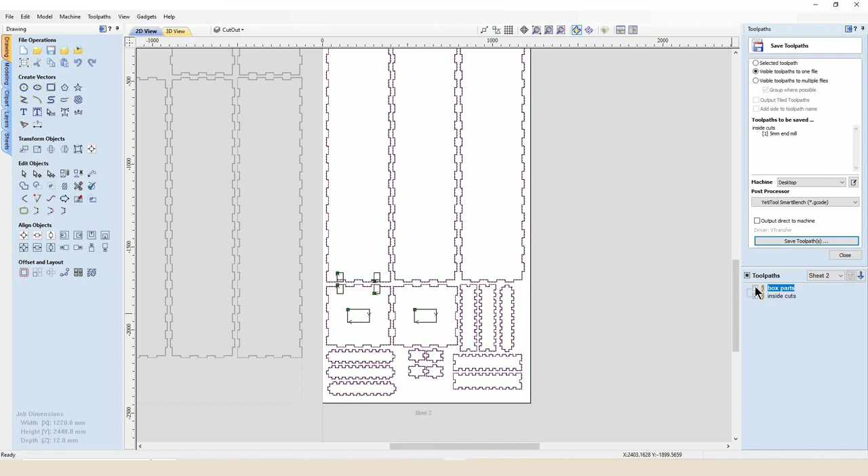So just as a recap, you can come over to save. You can save each toolpath as a separate entity if you wanted to break it down into separate parts. Again, you could go into this box parts and separate this so it cuts those 2 in one file, cuts this in one file. You can play around with it, get it exactly as you want, but the most efficient would be to select the visible toolpaths to one file and select both of those, and as you press save for your G-code, that's going to save that into one nice neat file for you.

So there you have it, folks. That is how we designed the X-Beam flight case using VCarve Pro, which we cut using SmartBench.